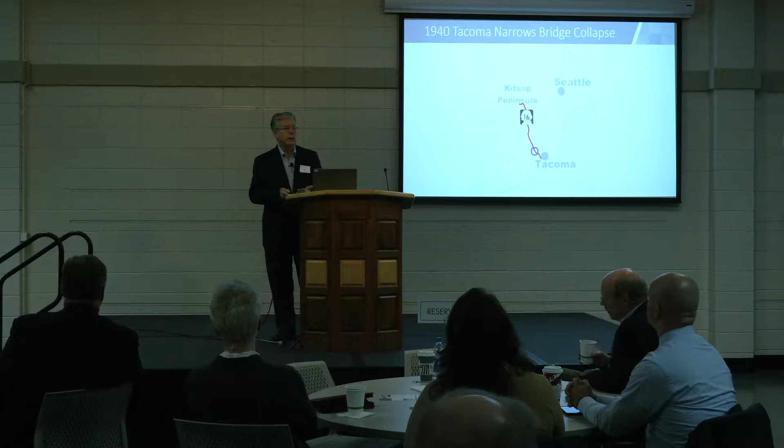If you're not familiar with the Seattle area, here's a quick map of Seattle, lower part of Puget Sound, which is near Tacoma. I've been over the current bridge quite a number of times. This was a bridge put up, remember 1940, we're talking pre-war. We were talking about a buildup of the Army and the Navy, both of whom had major stakeholdings in the development of this bridge to save a 10-hour drive to get to those areas instead.

The challenge is that even during construction, this bridge showed a lot of dynamic motion, meaning it's flailing around when subjected to the wind. These iconic videos taken at the time of its failure show the behavior on the day of the failure incident 79 years ago today. Gusts in this area estimated to be 40 miles an hour and greater.

It's extraordinary. If you had any engineering background at all, you will have seen these many times, and you've gone into the technical detail as to the aeroelasticity that resulted in a resonance that caused the bridge deck to do this, ending up with this catastrophic event. One of the questions I think that is so obvious that we may not ask is, why is that interesting? Why is it noteworthy? It's a huge amount of resources involved, to be sure, but there's another very basic reason that that becomes very interesting to us as lay people and certainly technologists.

We don't expect engineering failures. That's not why we design things. We design them based on engineering principles. That means mathematics, physical properties, materials expected to have a foreseeable life, not that.

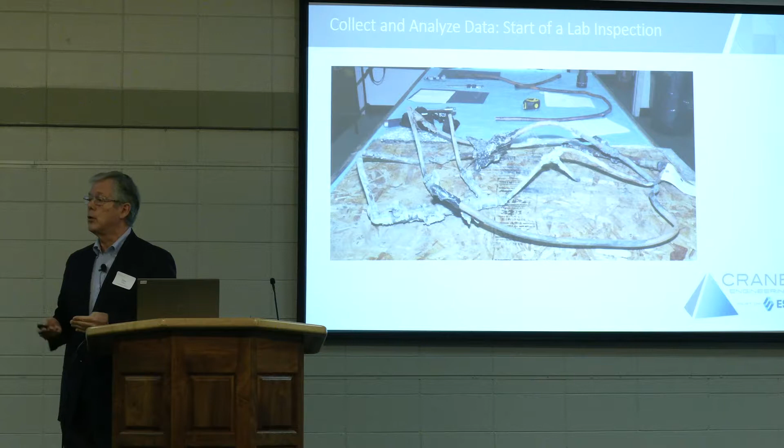Now, everybody, including my introducer, talks about CSI, NCIS, and so on. I will tell you that the way that that has really changed our lives as forensic engineers is not in the depth and the quality of what we do, but in terms of expectations of the average juror. Because typically, we expect science to be wrapped up in about an hour, including commercial breaks.

So yes, this one instrument immediately tells me that, based on a full-level molecular analysis, this object was created on June 12, 1789 in Lyon, France, late on a sunny afternoon by a left-handed artisan named Jacques, right? Okay, it's not gonna happen. A typical case investigation may last several years, and you'll see why later when we talk about it's not just the artifacts, it's all of the other things that go with it.

So, what is an artifact? This, from one of our cases, is a flare nut found at an incident. And you can see, especially in that central picture, there's a crack. I will tell you that that crack was the cause of a loose joint at that location. Now quickly, I can start to name the parties that would have been involved in a matter like this. Was it the installer that over-torqued it? Was it the manufacturer of the nut that had some bad brass, or what?

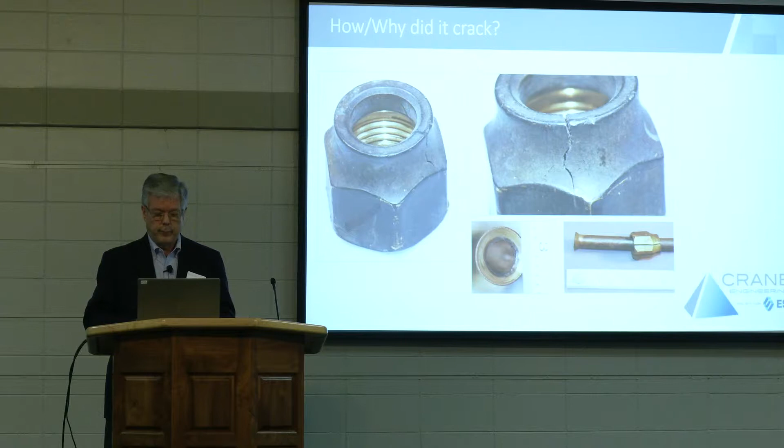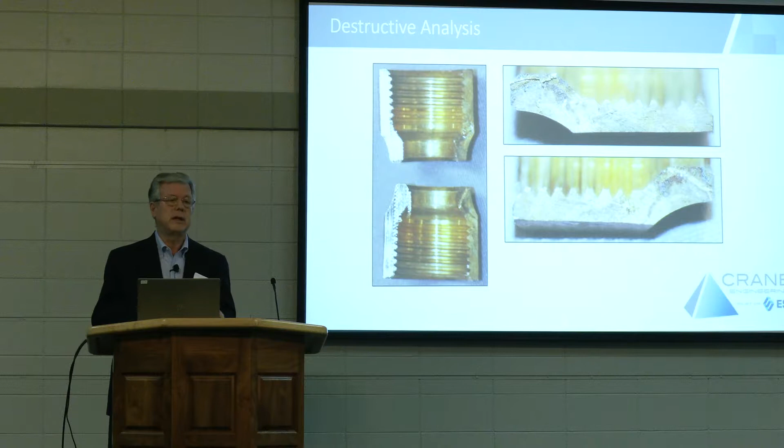So the next thing we do is we allow one of our people, which I call the pathologists of our work, a metallurgist, to look and analyze that fracture. In other words, was it bad metal or something else? And to do that, you'll notice the pictures on the left, we have to cut up and section the component. As a result, before we do that, we document the condition of that in great detail.

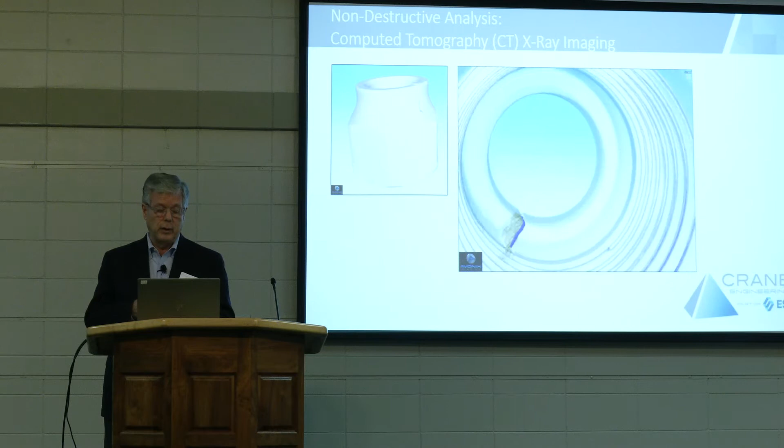This is using a CT scan that will illuminate that crack that we see in the side of it so that we can convey what we are doing here, not only to our client, but to lay people constituting the jury or possibly a mediator. Again, why? In the end, we are telling a story.

So in the end, I want to make you understand what I have learned with my knowledge and background without being so arrogant or presumptive that I could give you an engineering education in several different fields in the time of a few hours. So I will come to court with something like this to be able to show you what a flare nut actually is.

Also, I want to be able to convey my thoughts as an engineer as the steps went along. So you remember the picture that I had when my metallurgist was slicing my flare nut apart? It no longer looks like that, but because I did a CT scan, I could use 3D printing technology and create the equivalent in a 3D printed version that I could sit, if you're on the jury, I could sit here now and talk about this crack that we found, and now it makes sense. It may not have for that small device as to how that could possibly have happened.

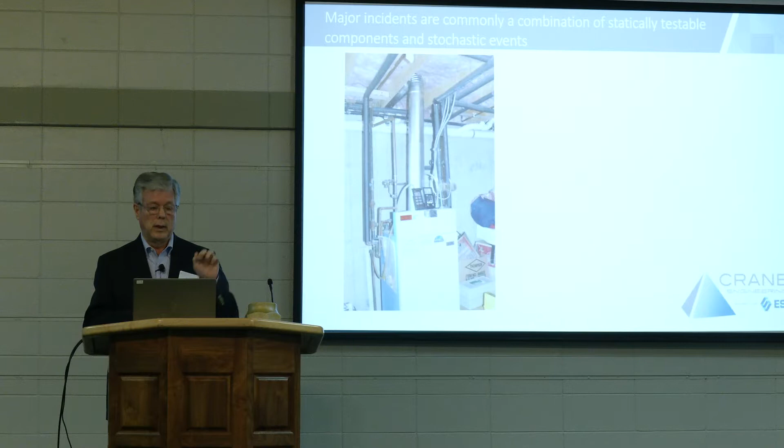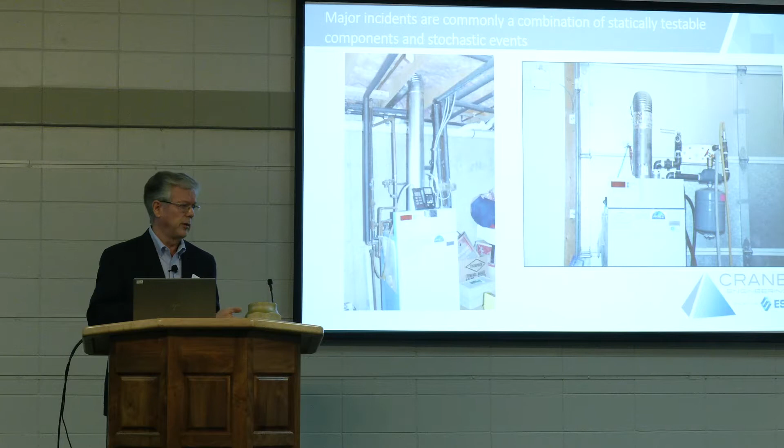This is a picture of the boiler in that residence. You'll notice the exhaust and intake goes straight up in that central flue and then out just above the foundation level. This is a picture of what we created in our lab over here in Plymouth. The challenge we found when we simulated the exact theory that had been put forth on this from the beginning is if you completely blocked the exhaust, this system would shut down. That's what it was supposed to do by design.

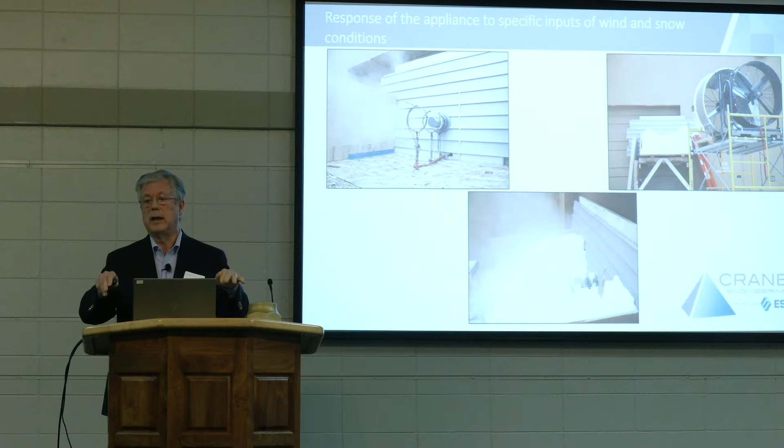So we added the ingredients that we knew were present at the time. On the left, you'll see a picture of our exhaust system at our laboratory. We have thermocouples set up to verify temperatures of the exhaust. And on the right, you'll see 2 very large fans that we had. We couldn't generate 60 miles an hour, but we were able to get a steady 45 miles an hour air impinging in that direction, exactly congruent with the incident. And the lower part is where we added snow from our own parking lot.

So a quick mention about carbon monoxide. There's carbon monoxide in this room right now. It's not affecting anybody. Carbon monoxide is a toxic component that you have to have enough of to really be a problem. OSHA states that the level of carbon monoxide to be an immediate danger to life and health is 1,200 parts per million. A properly operating gas appliance is allowed by code to have up to 400 parts per million in the exhaust. There's nothing wrong with that. It's being exhausted. Most appliances run at a level of about 10 or 12 parts per million.

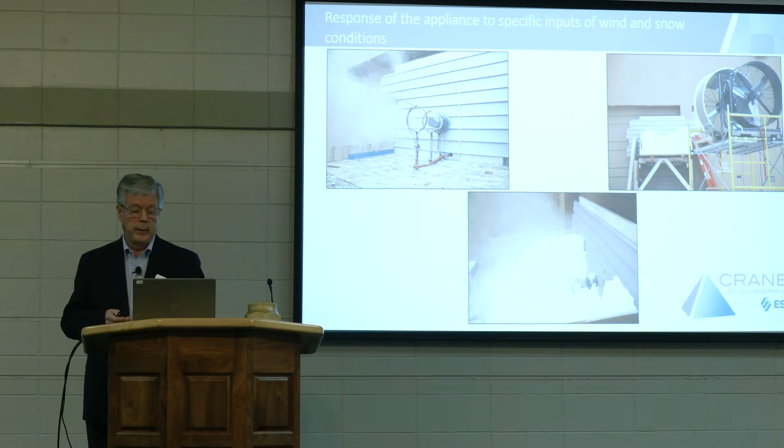Bear that in mind. When we put all of our laboratory testing together, including Minnesota snow, this is what we observed. You'll notice the recirculation that's happening. What we observed is that this effect created carbon monoxide buildup being drawn into the boiler intake, and the levels were in excess of 20,000 parts per million. The cause of the incident, therefore, became readily identifiable. Without the wind, without the deck that the homeowner had built that close to the exhaust, without the snow, without the intermittent snow that had stopped for a while and then started up again, this would not have happened.

The players involved in the litigation clearly were the homeowner and the family who had suffered the fatalities, and also the installer, the manufacturer, and several other parties related to the inspection of the device. It was noteworthy. The tragedy of this incident led to Massachusetts invoking a carbon monoxide requirement in their building code. Now, larger, complex issues require a number of different experts. You will see this in the next case study.

I used to believe that you only needed a mechanical engineer to basically solve any problem that you faced. I learned that from my father. That obviously is a simplistic untruth. The reality of today's experience is that we need to link the disciplines during the course of investigation to thoroughly understand without leaving an important assumption out of it. So, if you have a small team, it's a straightforward investigation, probably a small economic loss. A large team, it's just the other end of the scale. Complex investigation and large economic loss or serious injuries.

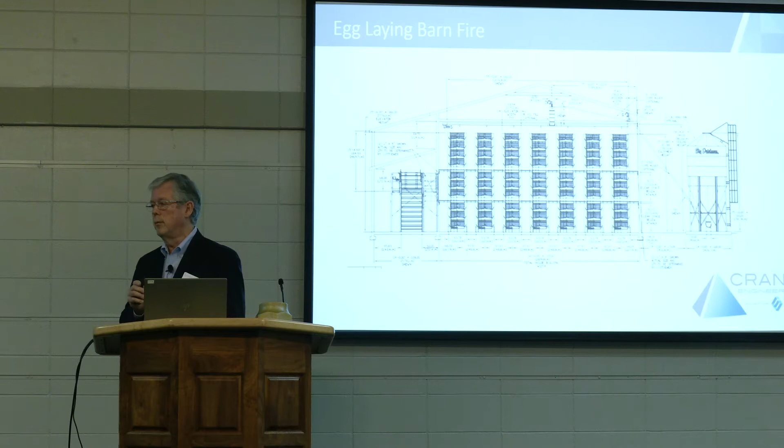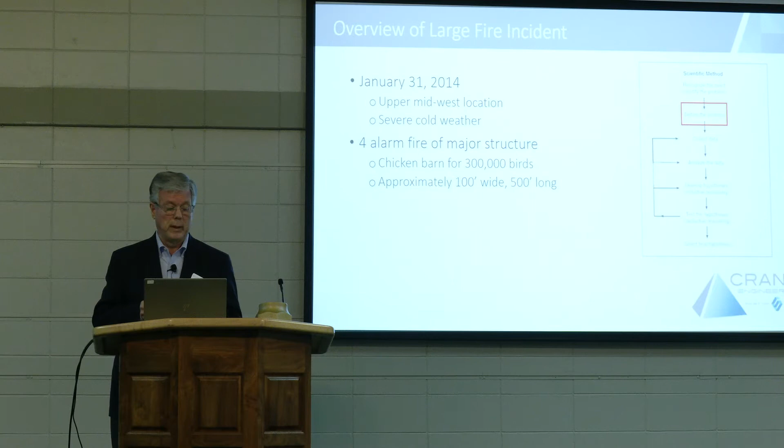This also occurred in the Midwest, not Minnesota, but a nearby state. And in the winter, the subject is a very large egg-laying barn fire. This was one of the engineering drawings portraying part of the schematic. So overview of the incident, and where are we on this? First, what's the problem? January 31st, 2014, upper Midwest, severe cold weather. 4-alarm fire of a major structure, a chicken barn for over 300,000 birds. This barn was about 100 feet wide and 500 feet long. Happened at night. The structure burned to the ground.

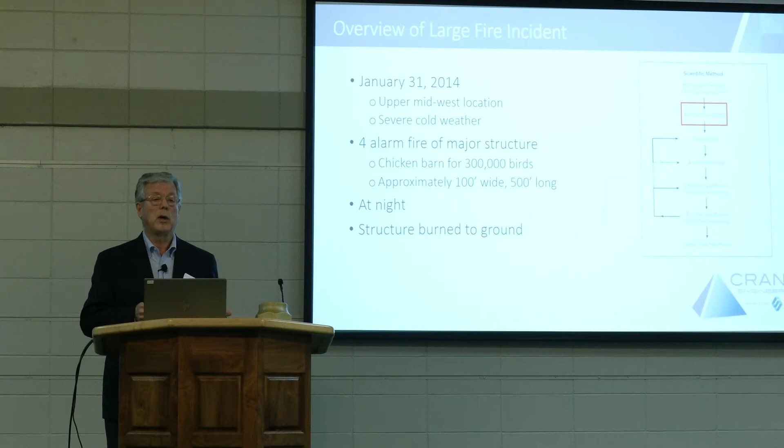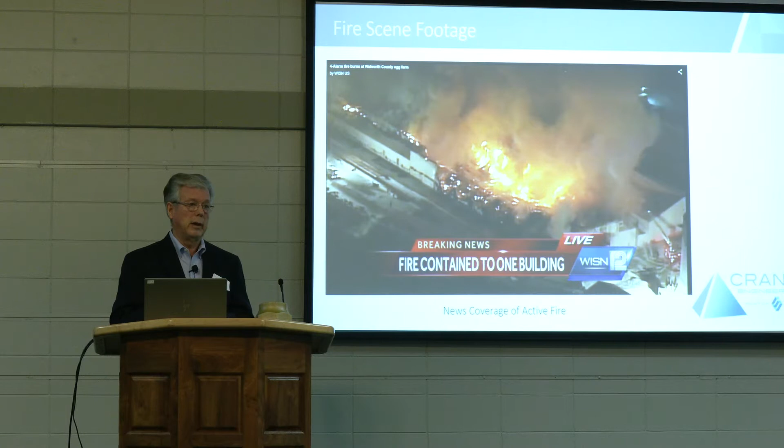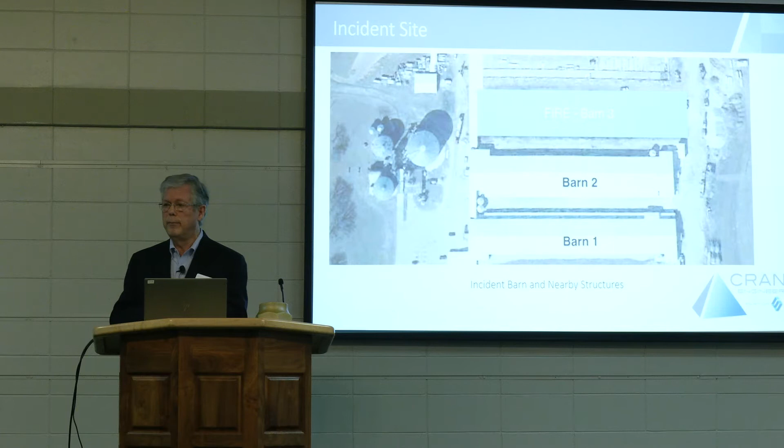This is a picture taken by a news helicopter as the fire is in progress. It was well involved early on, very little any firefighters could do to really extinguish it before it was a complete loss. There were no fatalities in this, aside from the livestock that was in it. But if you can imagine, the economic loss on this was extraordinary. Multiple millions of dollars, both in the livestock, the building, and so on. The building, curiously, was fairly new, like about 2 years old at the time.

This is exciting, I need water.

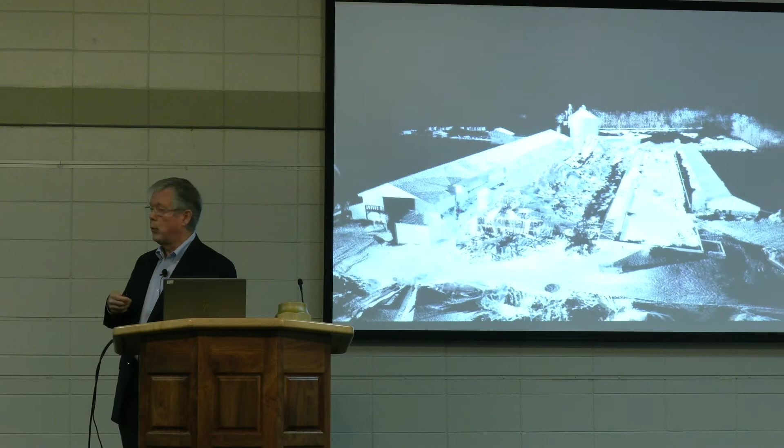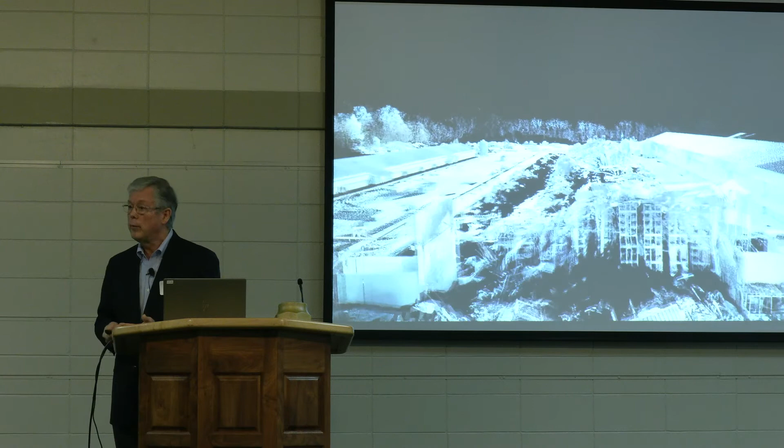So that's what the electrical room looked like. Again, we ran a 3D laser scan of this. This is sort of a presentation format flyby. It's convenient, it gives the portrayal of the entire scene. But actually, when these become useful, it's when we can actually go down into great detail and once again measure distances. We can preserve the scene in case it turns out there was a contractor who was not even known about at the time of the incident, who's brought into the action a year or two later. They have the benefit of seeing exactly what we did.

So what went into this team that we sent to the scene? Origin and cause, to be sure, for all of these reasons: patterns, witness statements, interviews. By the way, whether we're talking fire, vehicle accidents, industrial accidents, what you see there in terms of witness statements and interviews, that is typically very non-engineering kind of data. It's not hands-on, it's not measurements, it's not testing an electrical circuit, but those become vital in understanding the evolution of an incident. And engineers are not used to dealing with lay interpretations of what they see.

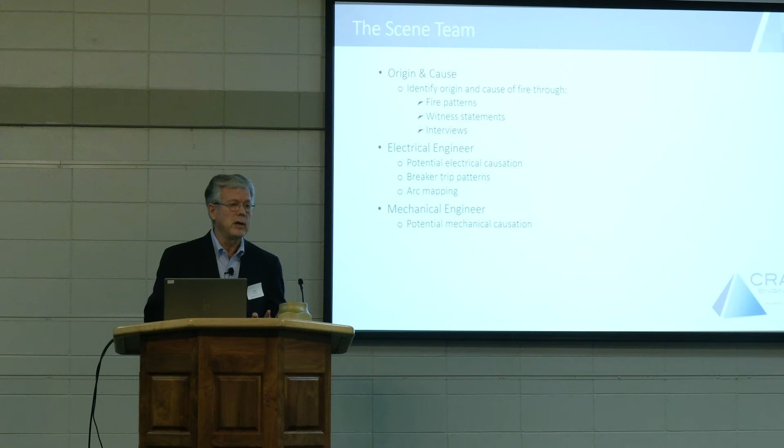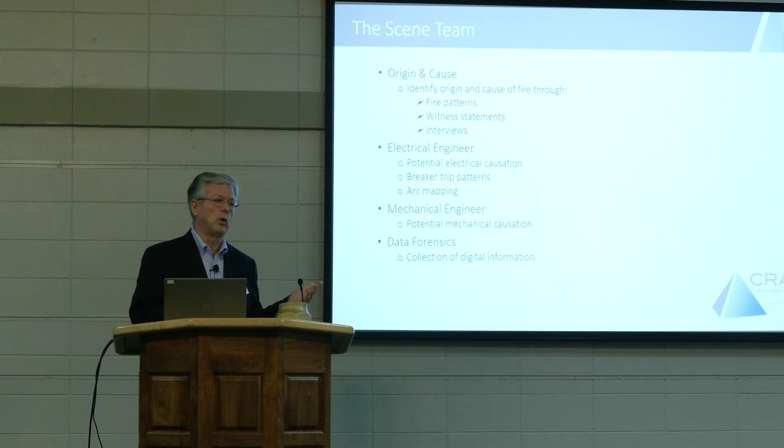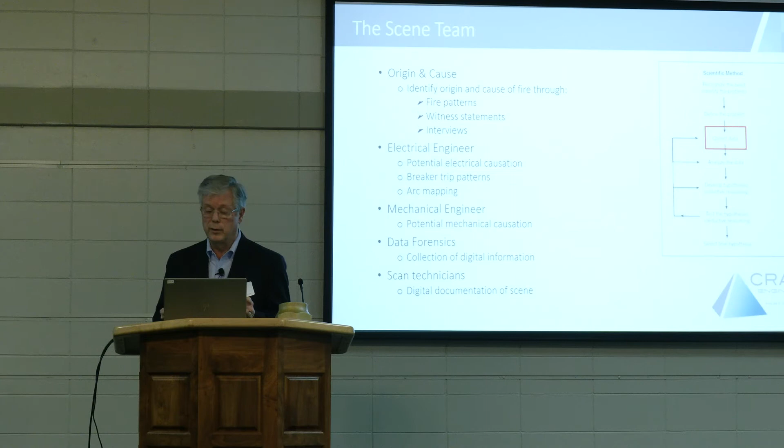So we also need, clearly, an electrical engineer for very obvious reasons. Equally obvious, we need a mechanical engineer. Again, looking at the power sources within the building and the location of those systems. And data forensics. It used to be, of course, data forensics didn't even exist as a field. Now it is invaluable because most of these systems are going to be controlled by a central programmable logic controller. To properly load that data without corrupting it, data forensics expertise is critical. And scan technicians, digital documentation of the scene, be that drones, 3D scanning, and even photography that can be turned into 3D representations. So this is where we are collecting data under the scientific method.

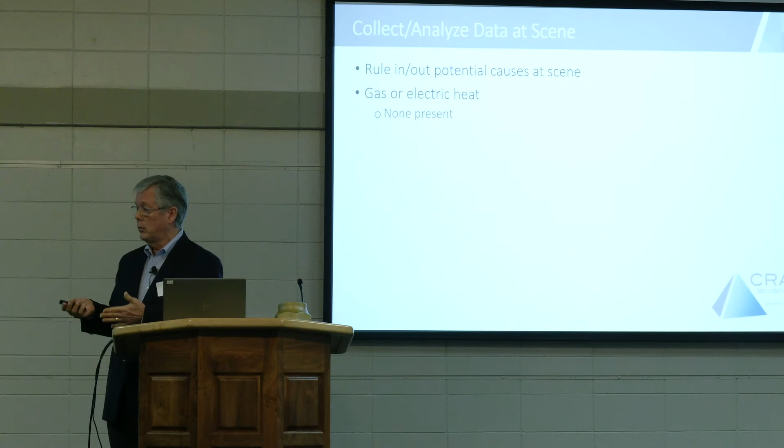So what we do to do this is rule in or rule out potential causes. The gas or electric heat, none was present. In an agricultural system like this, it is common that the heat of respiration of the livestock, in this case chickens, is relied upon for heat. In fact, you're trying to get rid of that heat during the coldest days. Mechanical issues. All mechanical systems were off except the fans. If you want to follow this, remember the word fans. Electric process equipment. It was last used 4 hours before the incident. Lighting circuits, not on. So now we're analyzing the data to come to a better understanding of what we had at the scene.

And notably, what I'm illustrating there is this is very interactive. We collect data, we analyze it, collect more, analyze it, and go on. So now we're ready for the lab exam. Why? We process the artifacts, collect the data, document, testing. And the experts here are the whole suite again.

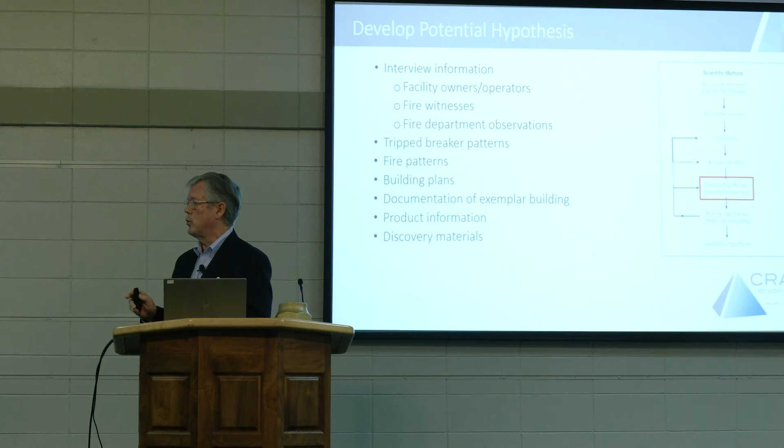So we're at the point, and I say in this presentation I'm only a few minutes into it, but this is about a year after we start, where we can start talking about developing a hypothesis. We have interview information now from a wide variety of sources. We also know the tripped breaker patterns, fire patterns, building plans, product information, discovery materials. Product information, again, foreshadowing, critically important as this case developed.

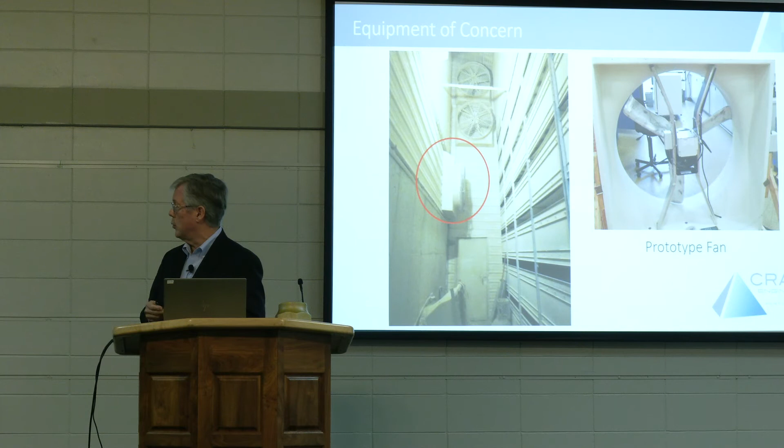This is where it began to get interesting because on the face of it, there shouldn't be a problem. The technology is old. However, the more we looked at it, we came across this particular note in the manufacturer's material for the inverter. Be sure to maintain the specified clearance around the inverter and to provide adequate ventilation. Otherwise, the inverter may overheat and cause equipment damage or fire.

Well, that's interesting. Now, you have to remember that this component was incorporated by the manufacturer of the fan as part of their control system. So let's take a look at what the fan manufacturer did with this instruction and that component. Well, there we go. Some of you I saw were not taking notes, so let's go back one.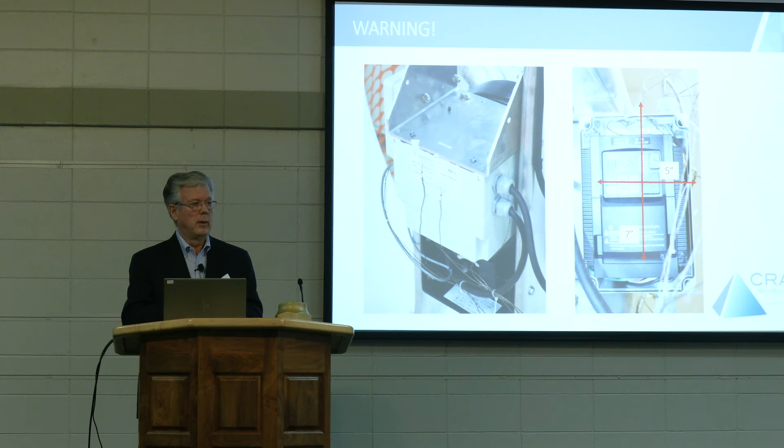When we open this up to examine the interior of this component, what we find, the fan on the left, you see the RTV, the silicone adhesive that's used there? That's not there from the manufacturer. That was placed there, it turns out, from deposition information from the manufacturer of the fan, because in preliminary testing, they were finding that some of those components vibrated loose. So they just added some RTV.

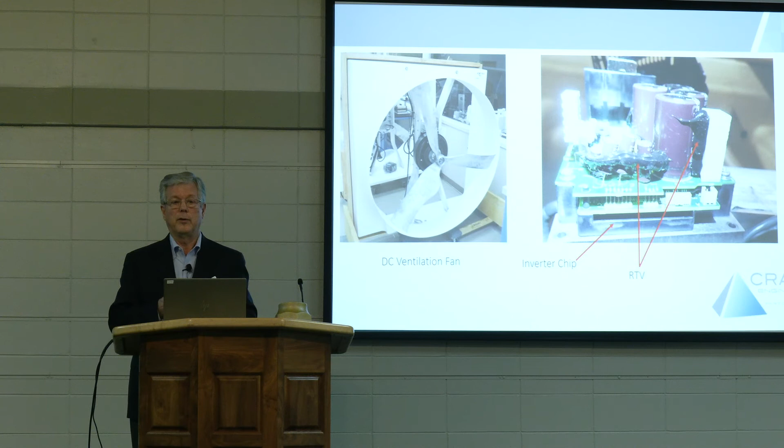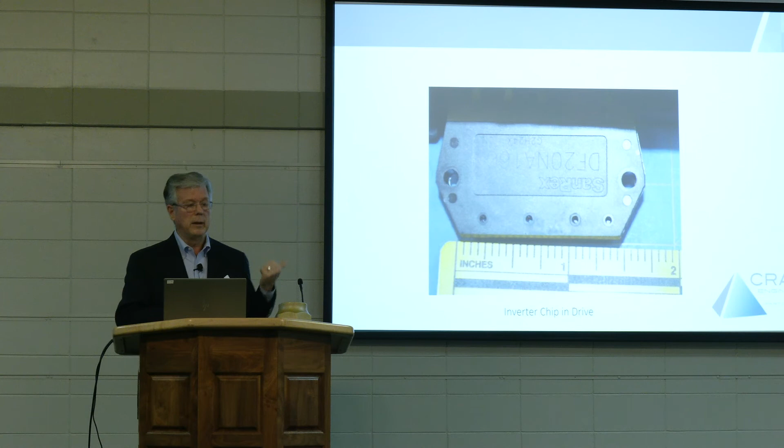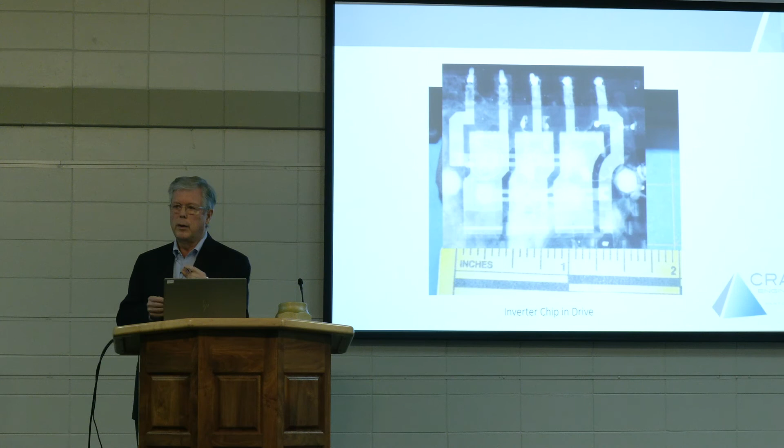And you'll notice as the slide points out, the inverter chip is right at the bottom here. So let's take a deep dive into the inverter chip. This is its exterior. We never did open it up, but we did run an x-ray on it. The yellow circles, it's a little faint on the screens there, but they portray two areas in that inverter chip where we can see that the connections are completely deteriorated. Got some nice causation shaping up.

So what are the key steps? We identified the fans as a likely origin and cause. They were in the place where it was first observed. Now we understand why that was a potential. We looked at exemplars, and in our business, an exemplar means you go back to Walmart and buy another product of exactly the same make and model, and ran tests.

We reviewed scads of discovery material, product literature, depositions of the manufacturers of the fans and the inverter, and we performed extensive testing in our laboratory. We also had the plastics tested by our polymer scientists to evaluate their suitability for the job. We looked at alternate hypotheses that were being offered by other parties and basically ruled them out. It didn't make sense with all of the rest of the information.

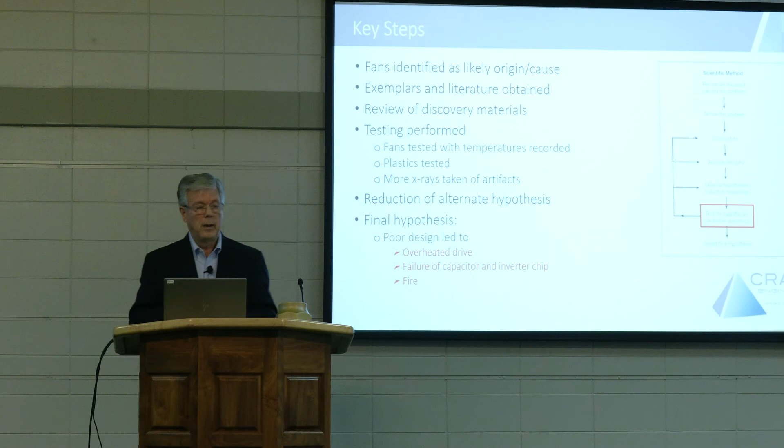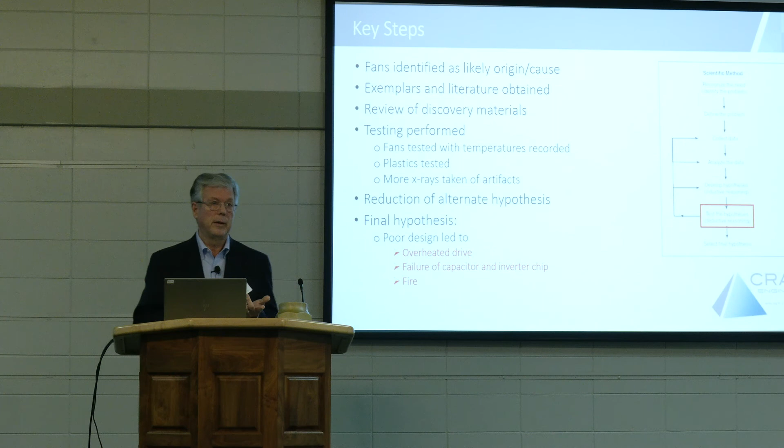Final hypothesis: a poor design of that fan led to an overheated drive, failure of a capacitor and an inverter chip, and ultimately the fire. So when we put it together in a very court-like setting, the key experts create reports, they fit together and present and support the hypothesis that we've developed along the way, and these are not standalone.

They are going to be critically scrutinized by opposing attorneys and opposing experts. We know because that's what we do as part of our job as well, looking at the opposing experts. The legal team must defend experts to prevent and defend Daubert challenges. That's a term of art in our business. Famous case about 25 years ago where the experts were proven by the courts not to have sufficient knowledge and background for the work that they did for that case. So when they bring a challenge, it's called the Daubert challenge, trying to eliminate the expert.

So we've come full circle. Why are experts used at trial? Fundamentally, it's pretty simple. Somebody has to explain in a lucid, understandable, storytelling kind of fashion what happened. And importantly, what was the role of the parties in the failure? Obviously, this gets massaged by all of the attorneys and by case law, but that's the role of a forensic engineer. I'd be glad to take questions or any other comments.